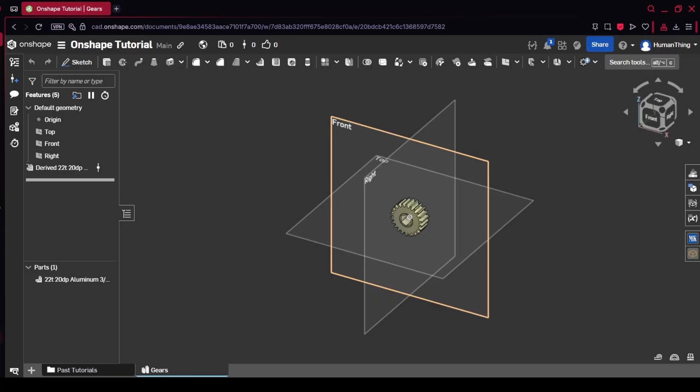Our first step is to use the measure tool from last time to figure out the rough relative size of this gear. We're going to take this point on this corner tooth, go straight down, and take a point somewhere around here. You see this minimum distance says it's 1 inch - that is about how big the gear is, and that will be very helpful for us. Remember this number: 1.086.

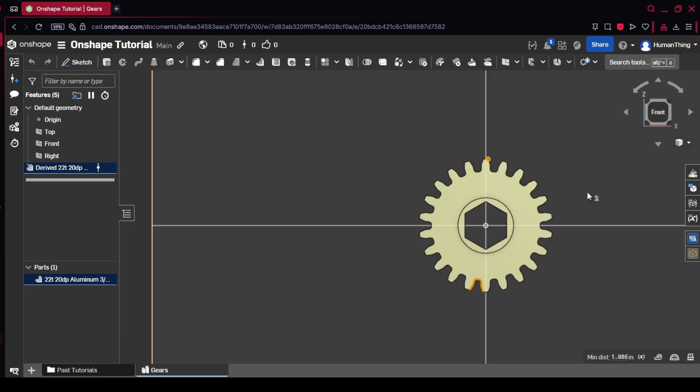We're going to make a sketch. First thing I'm going to do is put in the circle so I don't forget the size, 1.086. Now if I drag this over here and put it in the center, you see how close that is to the size of that circle?

If I duplicate this circle using Control-C and Control-V, now we're going to use something I didn't tell you guys about - this area has a bunch of what's called mate features, which you've probably seen popping up throughout. Sorry, they're not mate features, they're constraints. What they do is basically hold things in place. If you set two things to be equal, they will always be equal to each other, always the same size. If you set two things to be parallel, they will always be parallel. So these are things that restrict the movement of parts.

You can delete them, you can add them however you want. If something in your sketch is telling you a constraint is not working, try deleting a couple of the red constraints and it'll probably fix it.

But what we're here for this time is tangent. Because if I tell both of these to be tangent, look at that, they're now together. And because they're together, if I try to move one, you see how it moves both of them and they try to stay together?

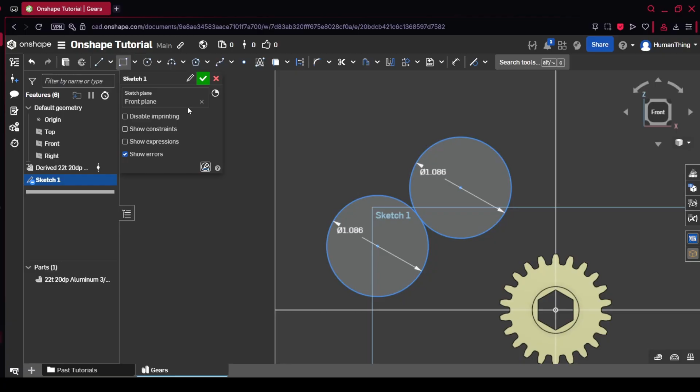What we can do with this is make a box around this real quick, doesn't need to be anything fancy, just a box. Now if I take this part and extrude it by like 0.1, it's going to break because I have these on top of each other. You see how that's breaking? That's because these two things are on top of each other and it doesn't know what to do. Usually your gears would be bigger than your holes, but in this case they're not.

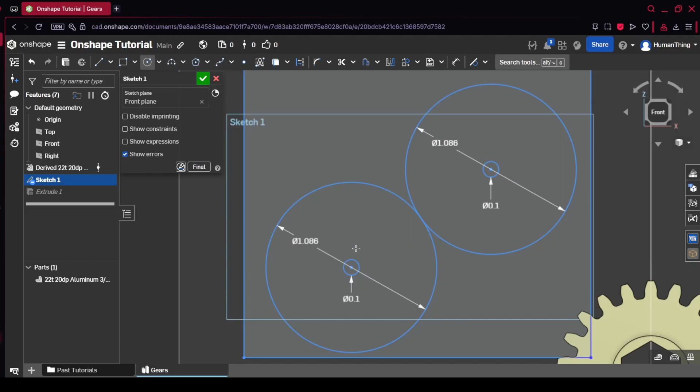So what I'm going to do is make some smaller holes in here. Hit check, and now for the extrude, because I don't feel like changing around a whole bunch of things, I'm just going to click all of those parts separately and merge them into one. So now I have this block here.

Now we're going to make another assembly. I know, crazy. This one is going to be called gears as well, just to keep consistent. So for once you guys are actually getting two documents in one, how special. We're going to grab our little gear here, and we're just going to grab this one here - actually, I'll grab this one, makes my life easier.

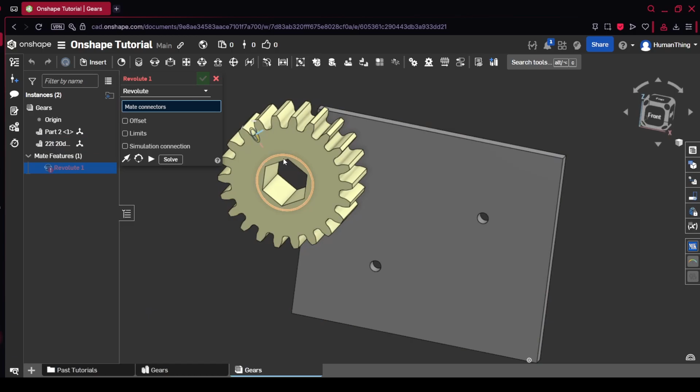What we're going to do is a revolute mate with the center of this and this part here. Flip it around, and now I'm going to copy and paste this one. Sorry, I've been going a little fast, I don't want this to take a while and this is kind of a tedious process. But we're going to do the same thing here, check it, and then fix that in place.

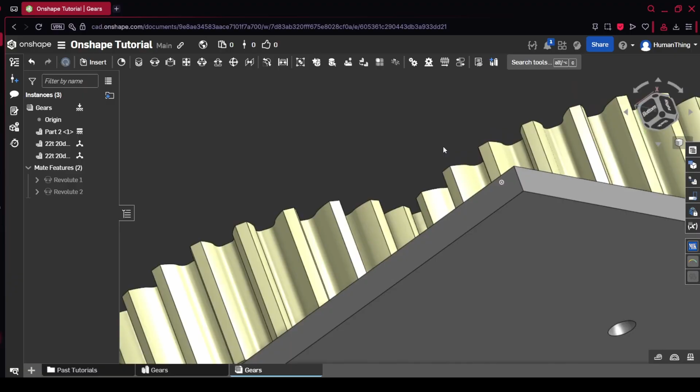Now you see how well those teeth mesh? If I just rotate this way a bit, you see, those mesh really well. If you actually were to fabricate this part and 3D print it, these teeth would mesh incredibly well, pretty much perfect. That could be due to the slight rounding we did based on the size of these and small imperfections. So chances are, when you actually see it, it'll fit perfect. You don't have to worry about this really tiny overlap here - if there is still a tiny overlap, it'll just kind of push them apart slightly, nothing to worry about.

But what we're going to get into is, you see how when I rotate one, it doesn't rotate the other one? Well, that's not how gears work, so we're going to use the gear relation. The way this works is you click it, click the two mates you want related to each other, and hit check. Now if I spin these, you see, now they behave like gears. You can chain these together to make really long chains of gears, but now they spin like each other.

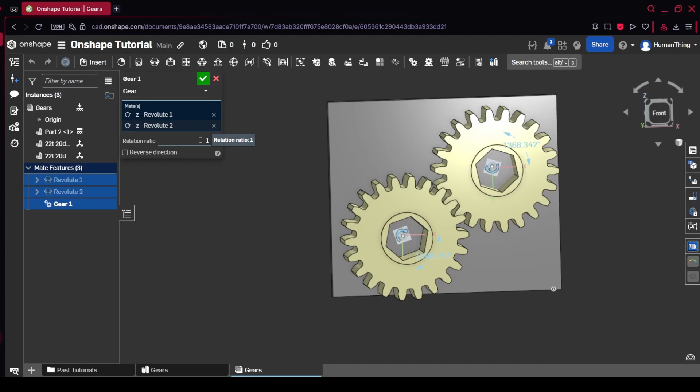You can even put in a gear ratio - these ones are just 1 to 1, but if you put in a ratio, it will actively change the speed as they move. And yeah, that's pretty much all there is to gears in Onshape. Hope you enjoyed.